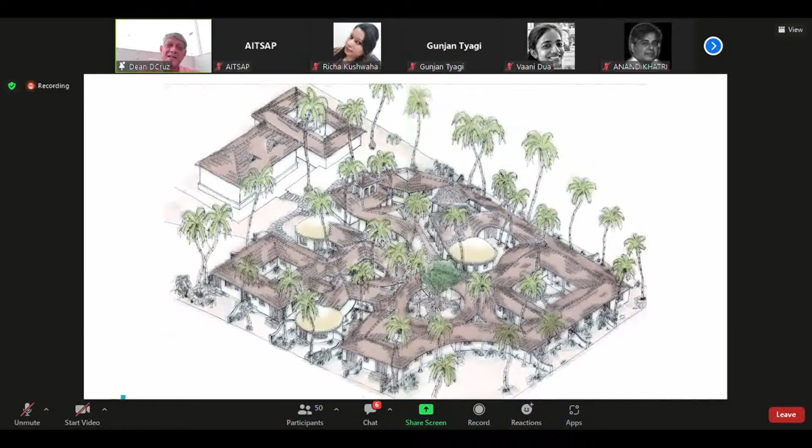Coming again, talking about architecture - as I mentioned earlier, architecture is not just about the building itself, but the negative spaces. This is a classic example, in this project, where we designed the building by first carving out all the circulation spaces and the courtyards. So this is a project which has square courtyards, circular courtyards, crescent-shaped courtyards, star-shaped courtyards, all linked together through this open spine that runs through it.

So each courtyard has 3 or 4 rooms off it, and every room is completely unique. There are no two identical rooms in the space, and each has a completely different shape. You can see the courtyards moving one to the other through these circular spine-like circulation spaces.

And of course the finishes here are much simpler, just plain IPS flooring, not even cast in situ. But you can see the brick domes, which actually brings down the cost and creates this great level of rooting to the architecture, and here, coconut roofing.

And everywhere there's some level of detail added. You can see even in the partition walls there's an archway, which again gives that sense of detail and material usage on the inside.

Because most often we work with the outside a lot. Most architecture we see today - very few people actually bring the architecture into the space itself. And that's extremely essential, especially if you're trying to recall traditional architecture, because traditional and vernacular architecture has that bit of architecture actually coming into the building, and not this bland white wall, flat, uninteresting space.

So there's another project where we looked at the themes of Goa. The climatic themes or geographic themes of Goa are a great influence on the architecture - so if you have a coastal house, a certain look, a house in the fields, a certain look, a house in the hills, a certain look.

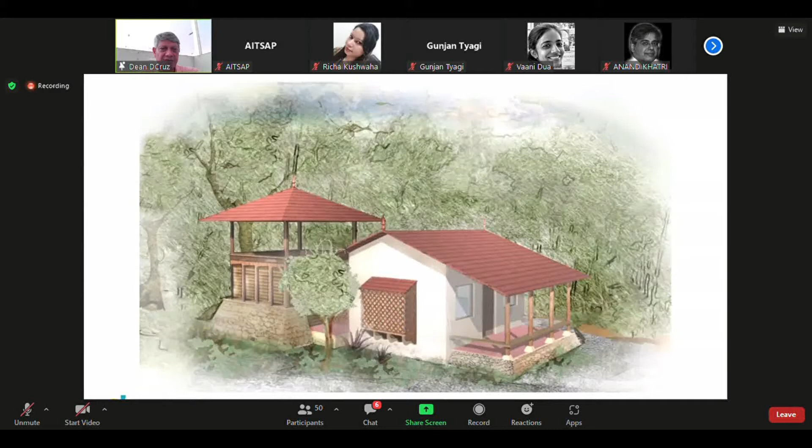Working with the Taj in Pench, there was an existing room which we gutted and created something comfortable and air conditioned. But we also created this room to spend the night in, basically a machan using forest wood. All the fallen trees from the forest department, we bought them, and created these pavilions with a sleeping area above and a bathing area below.

This is for the Taj again in Bandhavgarh, which is the opening slide you've seen. This again is a mud wall building, but a sophisticated mud wall. Rather than a solid thick wall, it's actually a double wall with insulation in between, giving great thermal insulation, all built by the local men of the village.

All the decoration was done by the women. You can see the decoration on the windows, the seats, and everything was done there. We got artifacts from the village, so artifacts and whatever else we could get were purchased in the village. That's the inside of the building.

You can see it's very simple, and yet it's very sophisticated, and despite its being so rustic, it's quite pricey. And you realize that when you talk about tradition, people are looking forward to actually recalling what the past is like, and experiencing what it is to live in something traditional and richer culturally, one could say. That's all built-up furniture in the space.

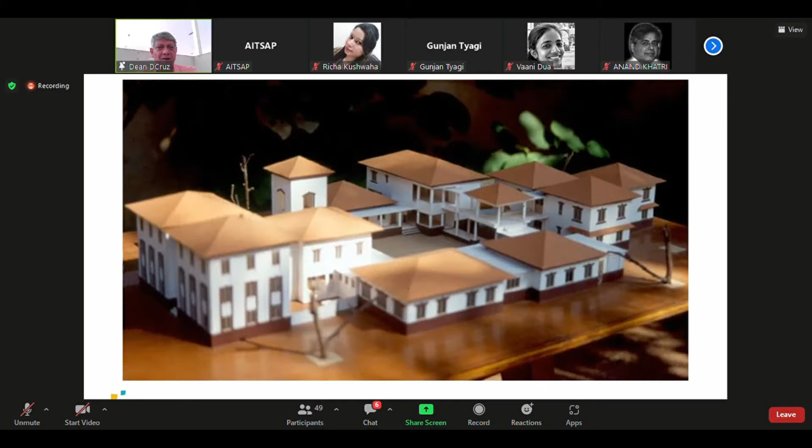This is a building meant for the studying of Konkani as a language. There are many buildings, so it has the library block, the classroom block, the administrative block, the residence. Most buildings tend to respond in a particular way, with identical windows as parts of the projects. But here we decided that every building, like the library building, has to respond to what it needs. So the windows come in between the stacks perfectly, long slim windows. The classroom will have a broader, lower window, or the administrative block has something else. The residential block has a different opening, but they're all held together by this common courtyard.

Again, another institutional building held together by a central courtyard, celebrating the entrance. Traditional architecture always celebrates the entrance of the building. It allows you a glimpse of what is inside, whether it's a courtyard or another open space. And it's very clear in its circulation and the way it sits in, allowing you to clearly understand what the pattern is. So that's one of the 2 wings in the building.

That staircase that you see actually becomes an amphitheater in the evening. And it's about rooting it, so adding these little elements like the staircase is to give it that sense of being in the past. This building, though, is very contemporary.

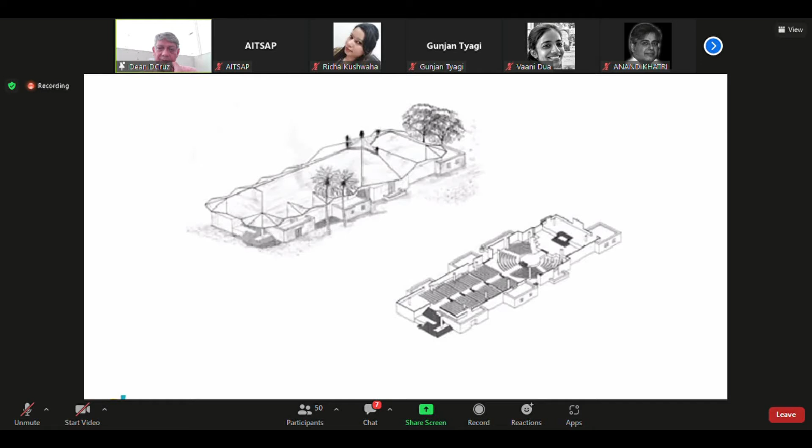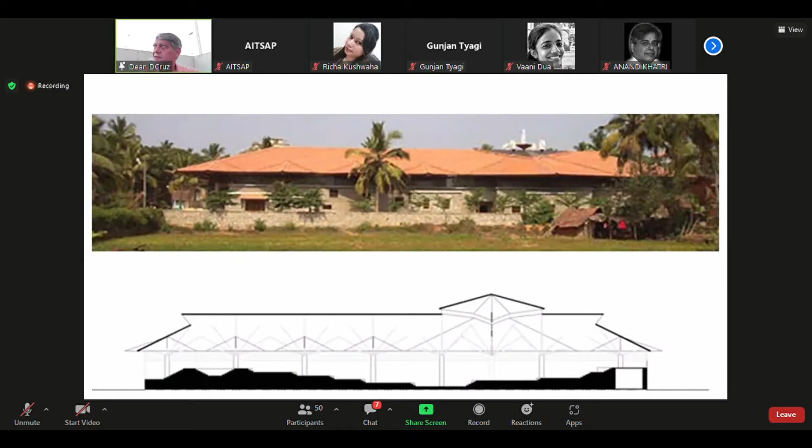It's a cathedral in Karwar. Again, we're looking at elements taken from the past, but assembled in a very contemporary manner. This building actually has tiered seating, and it's got air tanks below that seating which act as a cooling system. And while we use a traditional roofing system of tiles, it's not exactly a traditional form of roof, it's actually almost tree-like. So you have this roofing system which goes beyond the walls, and the walls actually are not supportive.

The roof does not sit on the walls like in traditional architecture, but actually sits on these columns and spans out like a tree, supporting a roof that covers the whole building. From the peripheral walls, it's just like glass or mesh that lets in light from the side.

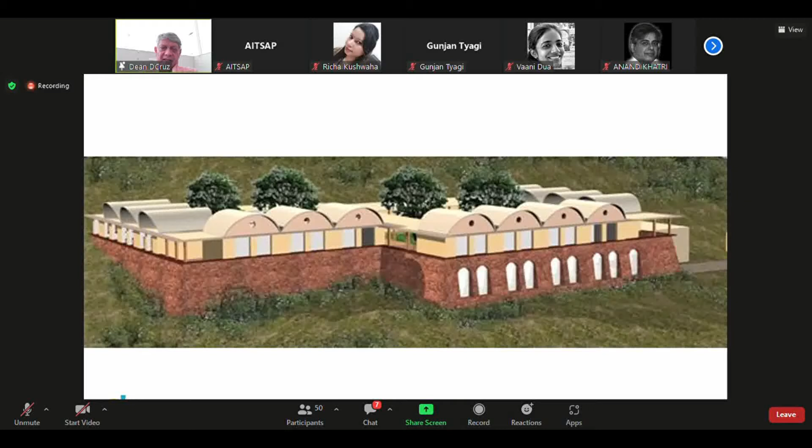This is a monastery for Spanish nuns, where they wanted the building to last 400 years because it's a cloistered monastery, so nobody's supposed to enter once they start living there. So we designed a building which is completely masonry, very traditional in its approach.

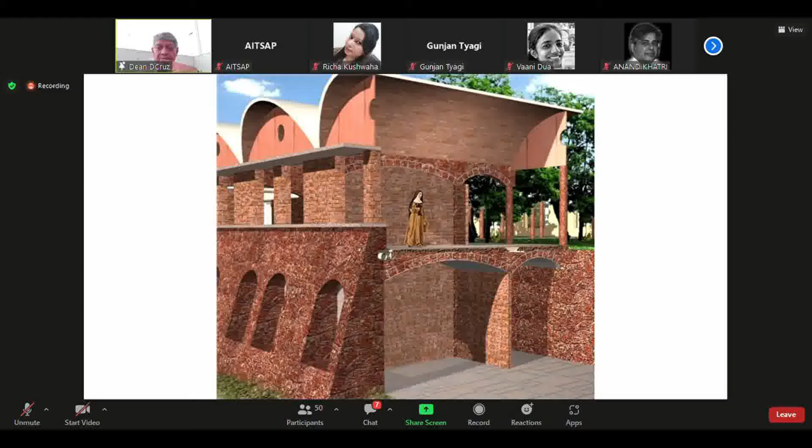We left space for services, so you can see the little ducts over there. Services always need to be upgraded, whether it's plumbing, electrical, or communication lines, so that could be added in very easily. And that's the final product.

Of course, for the roofing system, we thought giving it a brick vault system may be a little alien for Goa. So we added a traditional roofing system to it, which you can see over there.

This is the university in Hampi, Kannada University, where again we work in stonework. Hampi, as you know, has such great traditional architecture, so we looked at how we could use the stonework, and 90% of the building is actually all stone. The gopurams that you see there are actually wind towers.

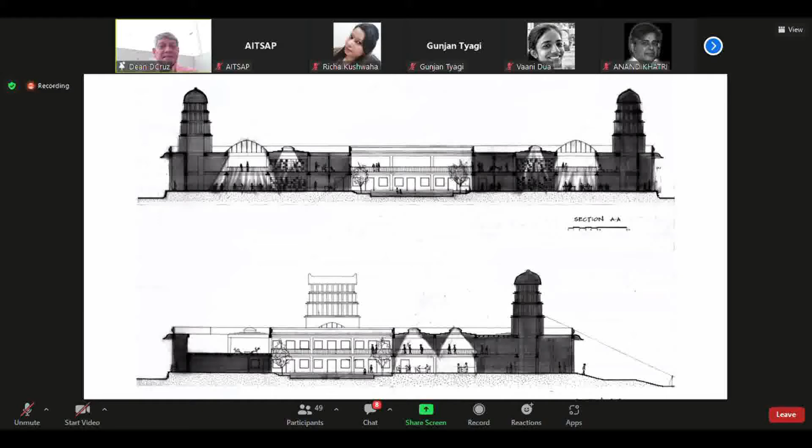There's a water tank on top, with stone fins that come down. We hydrated the air at a high level, cooling it down by almost 8 degrees. There are 3 gopurams, and the cold air enters the building and escapes as hot air past the central temple tank that we see there.

That's the structural system, with the columns and the flint roofing system that's been used. And that's the stone column, about 6 meters tall, about 50 by 50 centimeters. Initially, the contractor said we couldn't build it, but I said they've done it 300 years ago. So quickly they got their act together and were able to build this.

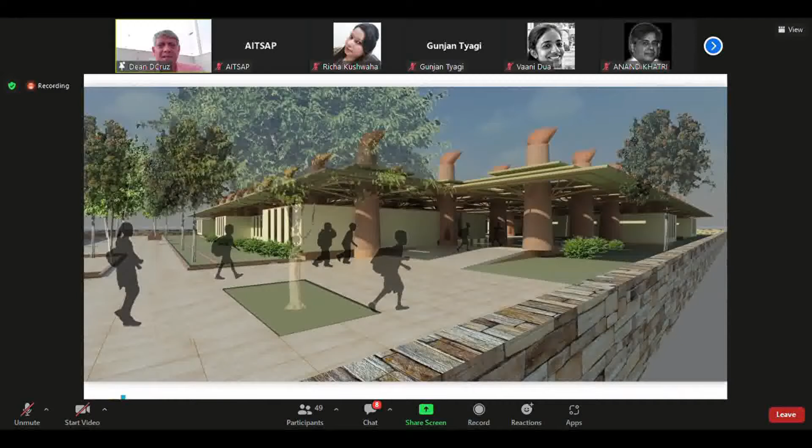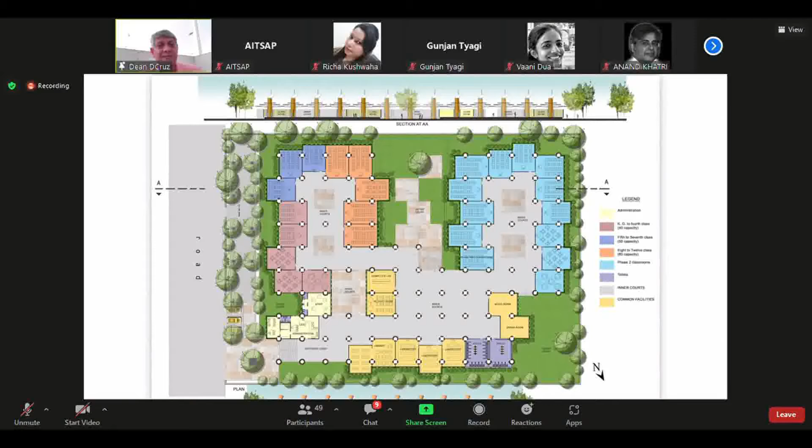Using the same principle of form follows climate, here in this approach for the proposed school in Bijapur, a project which is on hold, we looked at the same thing. Can we create these mini gopurams, which are actually wind towers? That's the structural system of the building. So you not only have a functional thing of cooling the building, but also a structural system that supports the roof and walling systems.

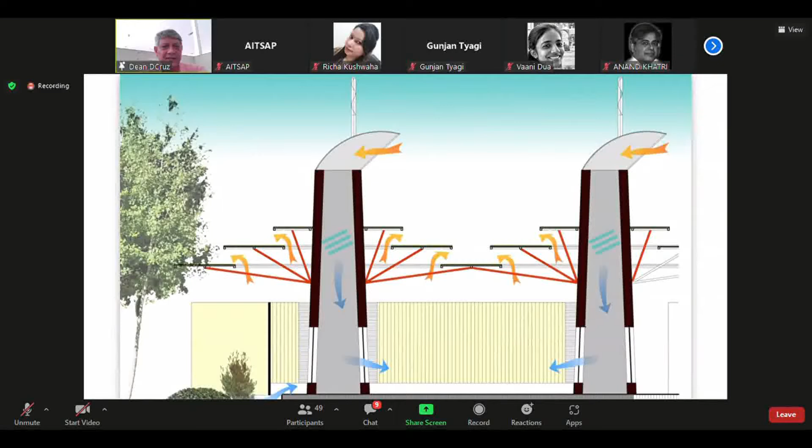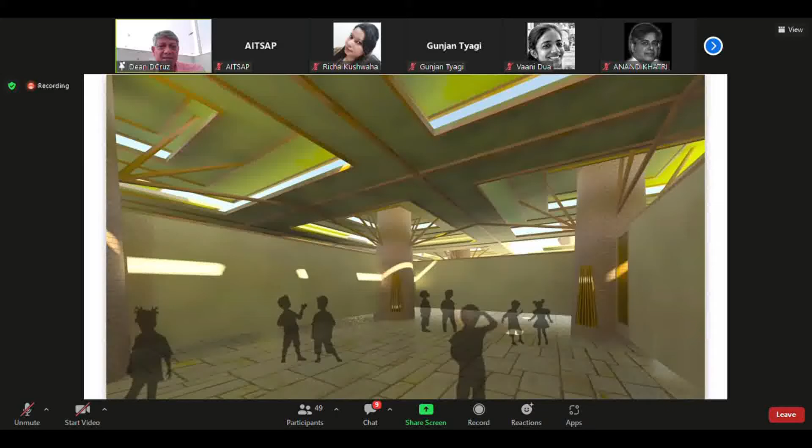So you take hot air, hydrate it, and let it into the building, creating this roofing system. Here again, shamelessly using new technologies and materials in a very contemporary manner, but being rooted. Bijapur has great bricks, so you can use that very easily, and stone as well.

When we talk about tradition, materials and technologies, this is a project we did for Maharashtra Tourism Development Corporation. They wanted a 40-room hotel in a place just north of Goa called Hadi, with great backwaters and little islands. We went there, and luckily there was a great IAS officer over there.

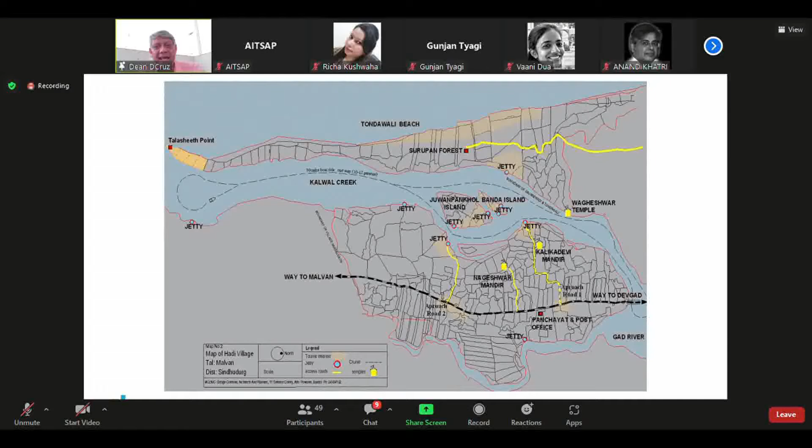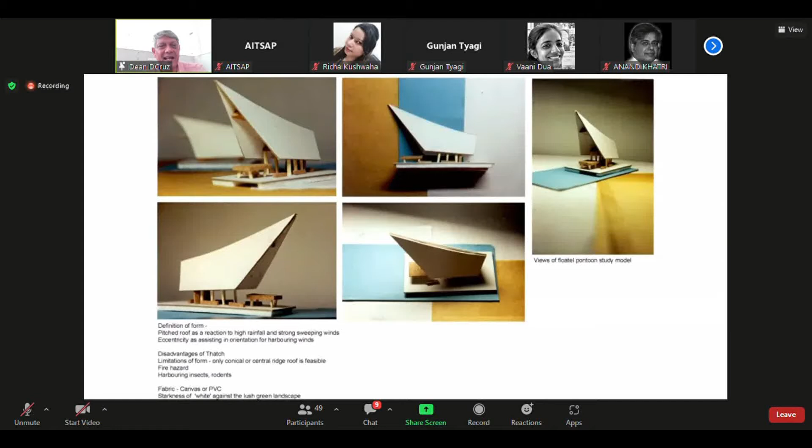I said, I wish we could build. And he said, okay, let's look at it. So we came up with the idea that since there are fisher folk over there, could we give tourism to the people? We designed these little floating platforms, like Kerala rice boats, where people could stay, coming together in the evening to act as a single hotel, or separating to go into the backwaters and have individual rooms in different places on the water.

We measured every house in the village itself and proposed that each house could become a homestay. Rather than becoming bellboys and waiters in a hotel, they could become the owners of that mini hotel, which had 1 or 2 rooms. The government would put together the organization, creating a cooperative, for example, and helping the people microfinance the project.

So you're providing tourism, but at the same time creating a great experience for the people, because the tourists would now live in somebody's house. They get genuine food and get to see their culture at much greater depth, and the local people benefit because their earnings will be much higher rather than having a paid job. They become the hosts for the tourism and the genuine experience of the tourists.

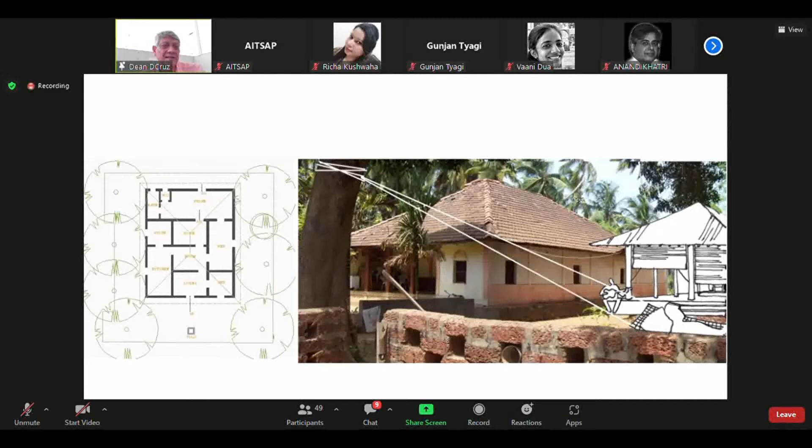It's almost a win-win situation, and the money which would otherwise have gone to build a hotel would go to upgrading their jetties, their beach facilities, their marketplaces, and their places of worship.

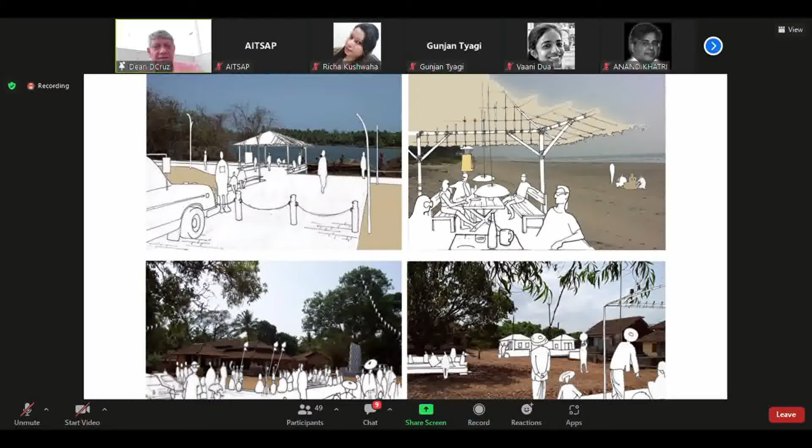So even the experience of the tourist is cleaned up, and there's a more sanitized and culturally rich backdrop that they have. We work a lot across the country. This is for the country club people.

How do we actually bring tradition into modern housing? This is a housing project in a rural area. We created modules, so you just buy a module. It can be a 1-bedroom module, but all these modules stick together so you can make a 1-bedroom or 2-bedroom configuration where you can add on. So all those four units can become one house, or they could separate into as many configurations as you want.

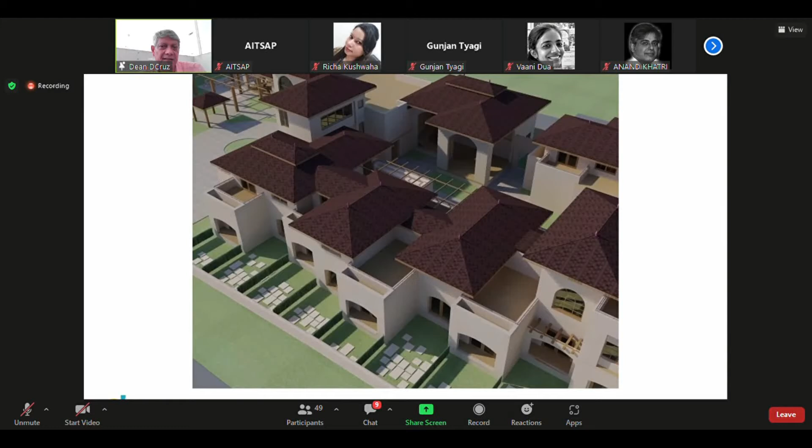Working with traditional architecture, drawing these elements, is essential for another hotel project. How do you draw tradition and create modernity so it stays responsible to the architecture around it? This is for the government again, a circuit house, working with the outside street and the building, which felt like it was in a public space.

It hasn't always been there. These are a number of projects where we're working with the street and the form of the building, but keeping tradition, materials, detailing in mind, along with the streetscape and elevation as part of it.

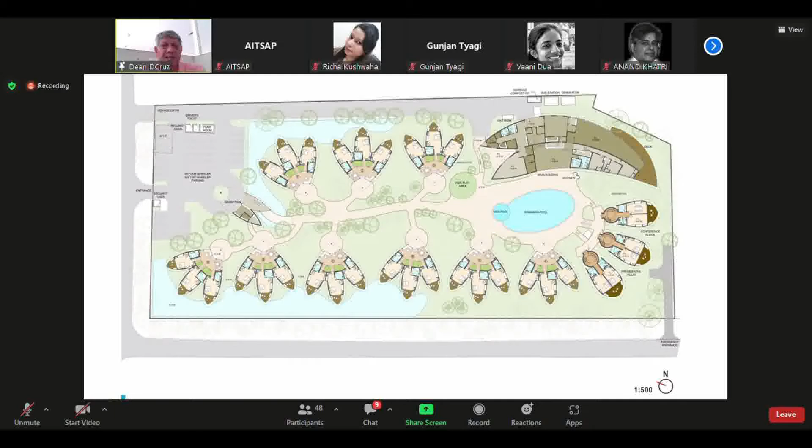In rural areas, as you've seen before, how do you take these elements but contemporize them into a form that has never been there? Just by the simple use of materials or a new shape you're creating, you feel that it could possibly be a traditional building in some way.

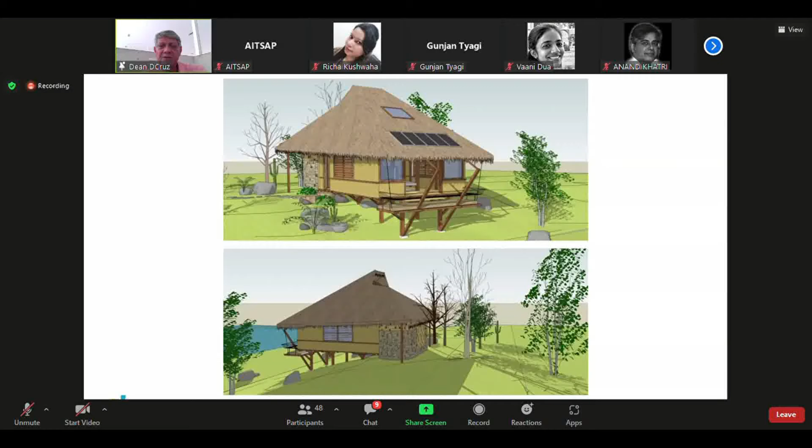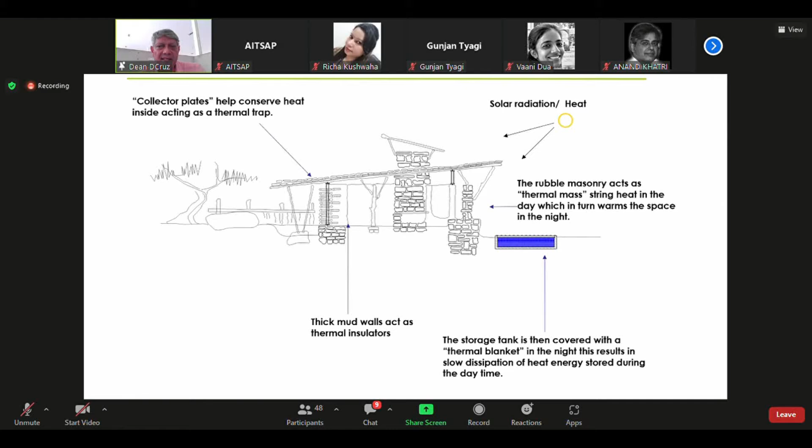These, of course, are lodges we do across the country. But when you do a lodge, it's not just about materials, it's also about how you address it climatically. This particular lodge has a natural ventilation system—it comes underfloor and moves out. For every project like this, we analyze it and ask: how do we heat a lodge in winter passively? How do we cool a lodge in summer passively? Understanding this is extremely essential.

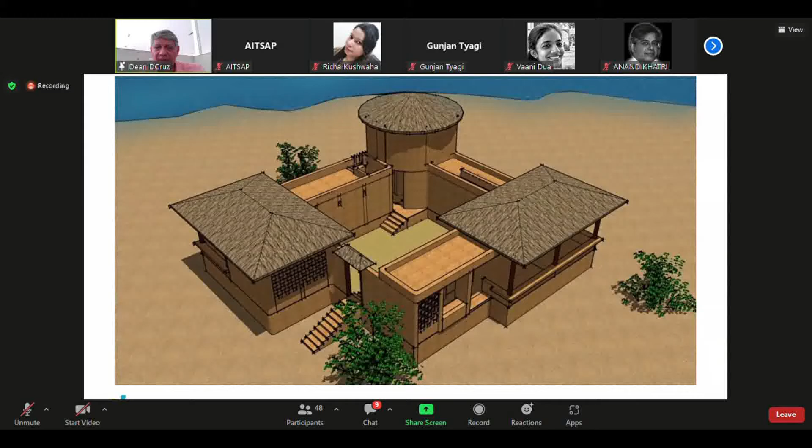How do we create new shapes and new configurations for lodges? If you take traditional elements and keep playing around with them in different ways, you create courtyards, using mud as a building material in a lion sanctuary, making it almost handmade and old world in a way.

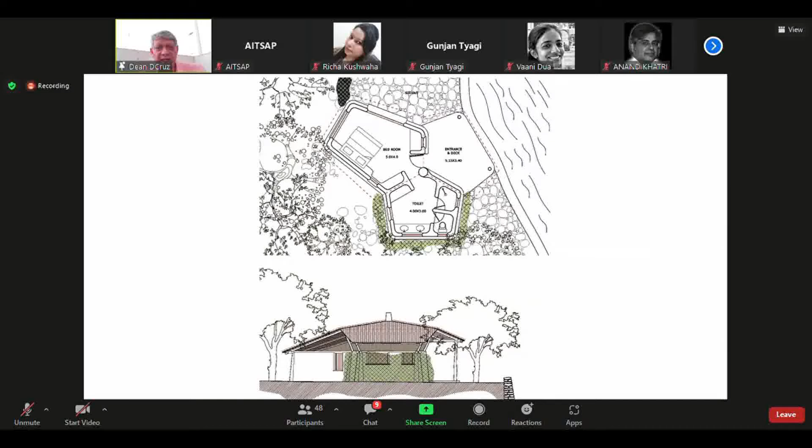These are various lodges we've had, and since I'm running out of time, let me just flash this last one. We worked a little in Ladakh, which has willow trees as its structural system, varying in length from 3 to 5 meters. We thought, instead of using a standard grid of maybe 4 meters, what if we use all the logs, from 3 meters to 5 meters?

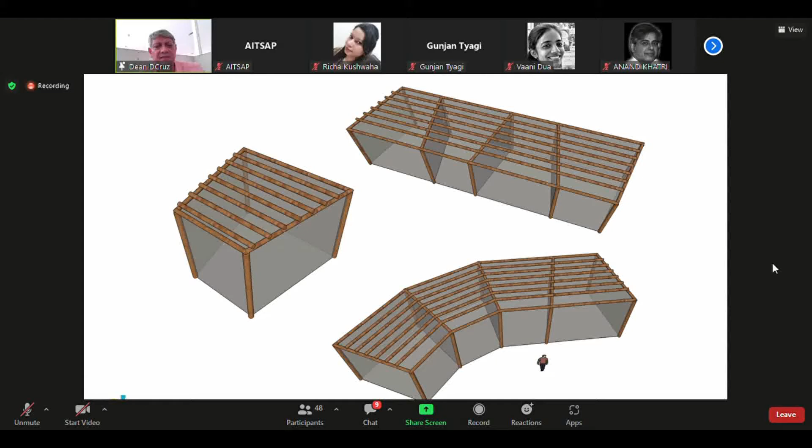So we created this trapezoidal system—one end is 3 meters, the other end is 5 meters. Just by switching the grid, zigzagging it a little, you can create a straight, long building. Or if you align it in the same direction, you can have a building that turns around. So using every single log, we've added a new twist to the architecture as well.

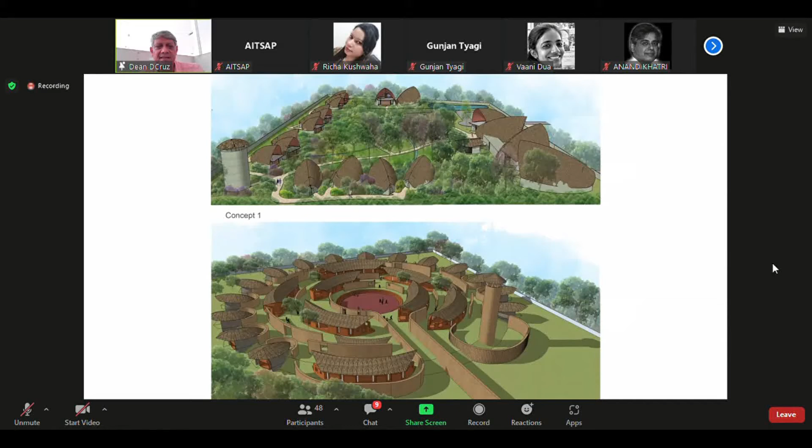Across the country, we're working on different projects, creating communities. It's not just about the building, it's about creating public spaces and how we do that. The government, for their market complex, wanted us to design it, and their vision was of course a concrete or glass-clad building.

But we said we have to look back at the past. What were our marketplaces like? What made them so nice and special? That was the pavilion-like feel. So we designed the marketplace to be very old world. A lot of the politicians were disappointed—they said it doesn't have any flash to it, it's very ordinary looking. We said, that's exactly what we want. We want something people can identify with, that has transparency, that they can move through comfortably, and that feels like it's always been there.

This is an interesting project where, when you look at traditional architecture, we always see something as permanent and something as temporary. Either it's temporary and goes away, or it's permanent and very difficult to work with.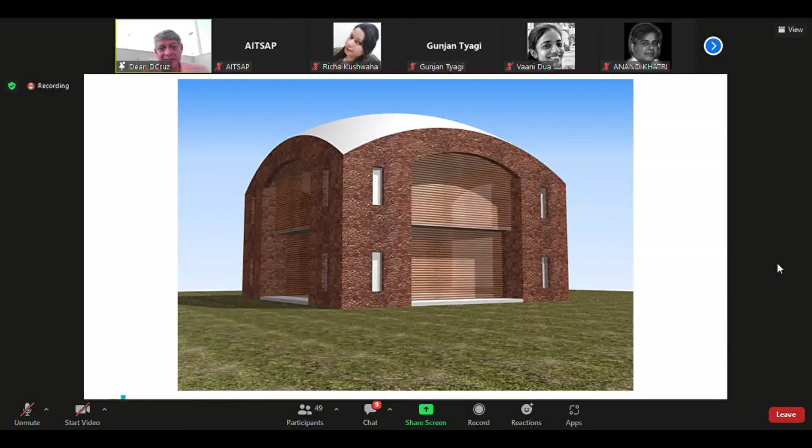So this is a house we actually designed, which never got built, with 4 giant columns. Each of the columns housed either a staircase, a toilet, or a kitchen. And there's an inner floor which is actually prefab, so you can have steel and cement board, a wooden floor, and lightweight partition walls.

And there was just a giant stone vault that would cover the whole roof. The idea was, once you build the stonework, you could inhabit it and keep on changing the configuration of rooms. The lower level would mainly be living rooms, the upper level mainly bedrooms, accessible through those towers. So everything else was lightweight.

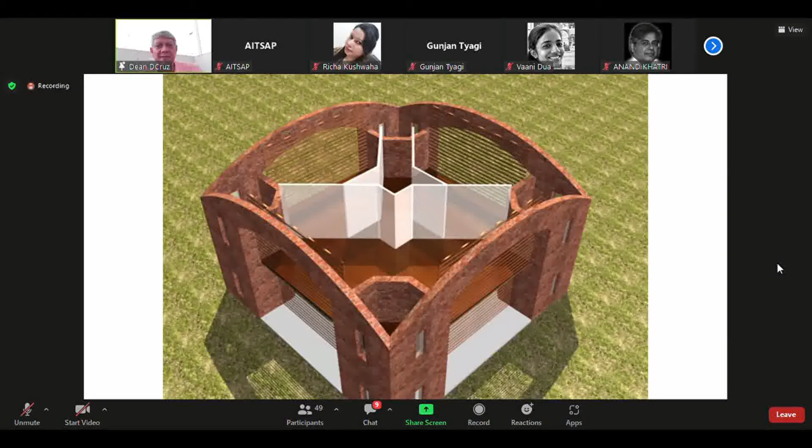So when the house was finished and its staying was over, you could actually just take out all these lightweight partitioning systems, made out of lightweight materials, and leave it like it was always there.

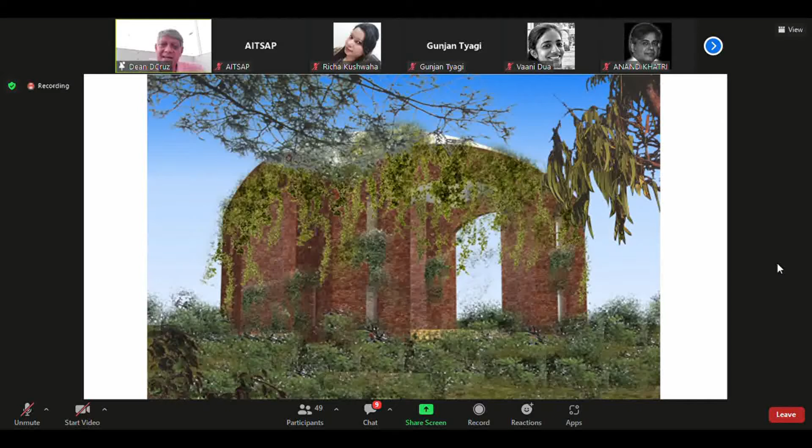Thank you, Dean, it has been a very beautiful session where we saw a lot of your buildings. I've heard you earlier also, and I've seen some of your works in Goa, stayed at Captain Lobo's, and seen some of your buildings. But I have been wondering how, with fewer drawings, would you actually create this system of managing things on site, because that requires a lot of supervision, whether it's the scale, the detail, or the building. I know sketches work very well on site, but still, I would like to hear from you what system is adopted, and how could you actually groom yourself from being an architect making lines on a piece of paper, as we teach our students, to being the genius that you are today.

Yeah, so I think it comes with experience of working with buildings over all these years. More recently, of course, we've ensured that there's good project management on board.

In the old days, we had very few projects, so we could actually afford time to visit site and make those little decisions on site, which is so important for very responsive architecture. But today, of course, we rely on project management to catch the glitches before they happen. But also, as I mentioned earlier, it's about empowering the craftspeople on site to allow them to make those decisions, rather than everything coming as a finished drawing.